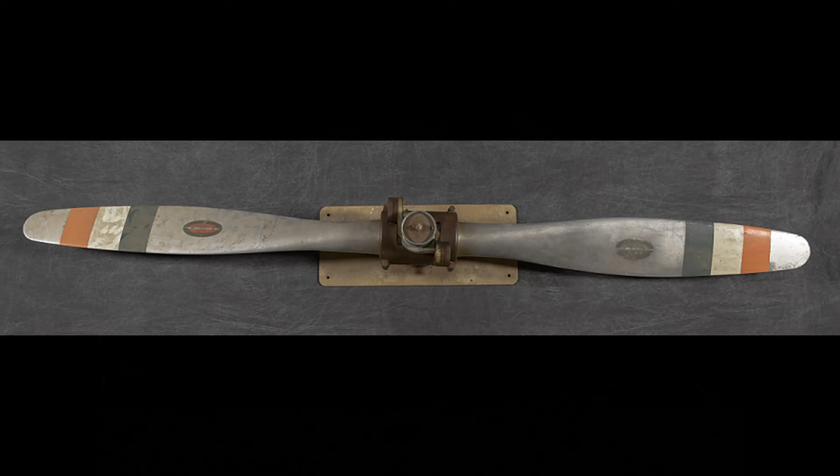Between the early 1900s and about 1940, we saw propellers go from fixed pitch to two-position pitch, then to variable pitch. Variable pitch props allowed the pilot to change the blade angles within a certain range using a control in the cockpit. These variable pitch props didn't last long because it wasn't a big step from there to add a governor to these types and make them into constant speed propellers. In other words, they added a governor to vary the pitch to keep the RPM set at the level selected by the pilot, within certain limitations. The details of how all this works is in my previous video, and I'll put a link in the description.

That brings us up to about 1939, and maybe as late as 1941. That's when nearly all the frontline US or British fighters were being equipped with constant speed props.

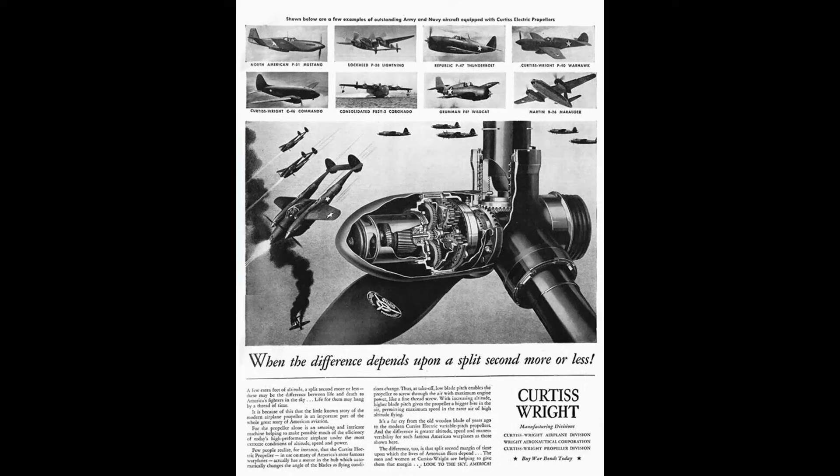Meanwhile, over in Germany, they were working on constant speed propellers of their own. It's very difficult to put exact dates on German technology from that era, but as near as I can tell, the first mass-produced constant speed propellers on German warplanes were Junkers hydraulic propellers, and they seemed to start showing up in 1938. These were used on Stukas, Ju-88s, Ju-188s, and Dornier 17s, and maybe some others. A wartime Allied report says that the Junkers constant speed prop configuration was designed for ease of mass production and was not of typical German precision.

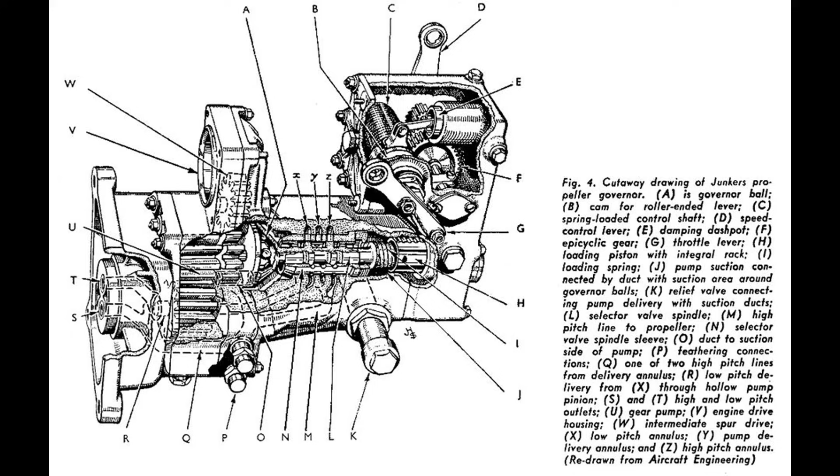Thus, it was quite heavy, and that could be one reason it wasn't seen on their fighter planes. Another reason it probably wasn't seen on fighters is because, as with the US Hamilton Standard Hydraulic or the US Curtiss Electric props, the Junkers unit didn't allow for a gun to fire through the propeller hub.

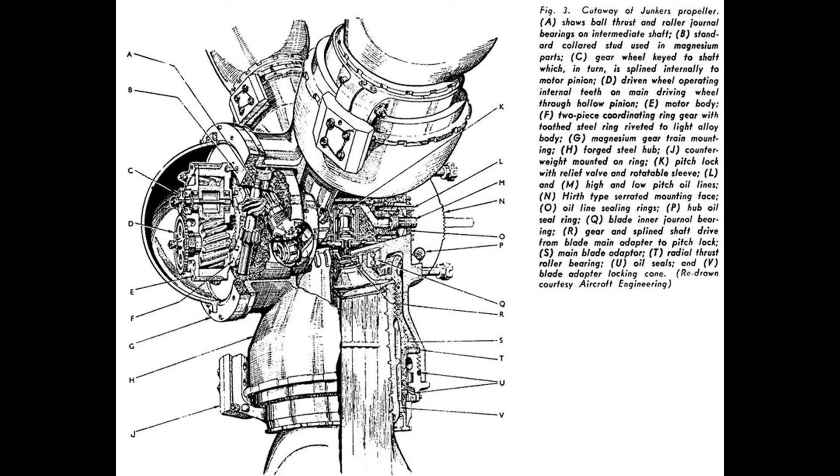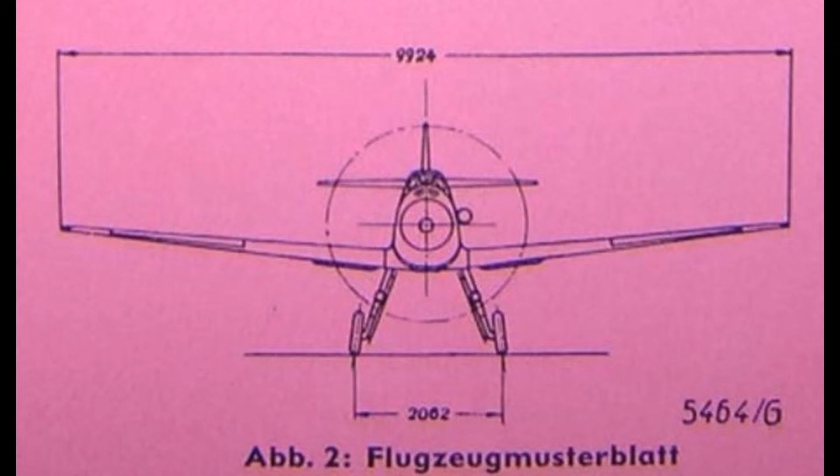The Germans seemed almost obsessed with firing a gun through that hub. They set the 109 up that way from very early on, and nearly every 109 that fought in World War II had a cannon firing through the hub. The 109's cannon is mounted a lot farther back than most people think. The majority of it is in the cockpit between the pilot's legs and at about groin level. I imagine it's quite loud in there when you fire it.

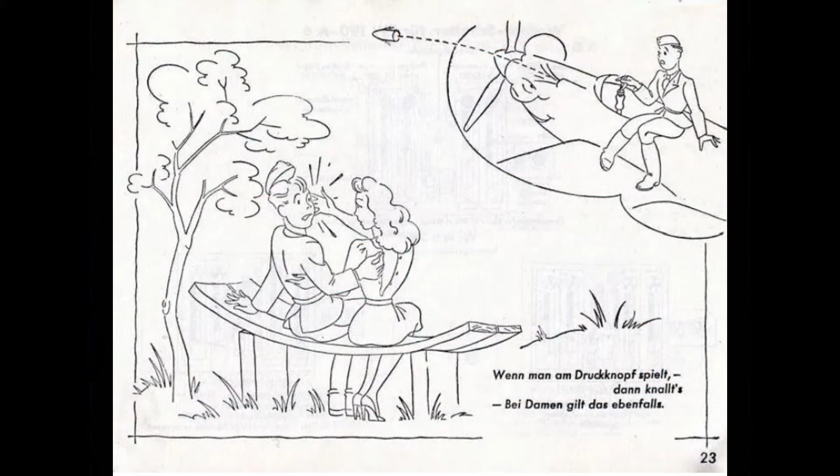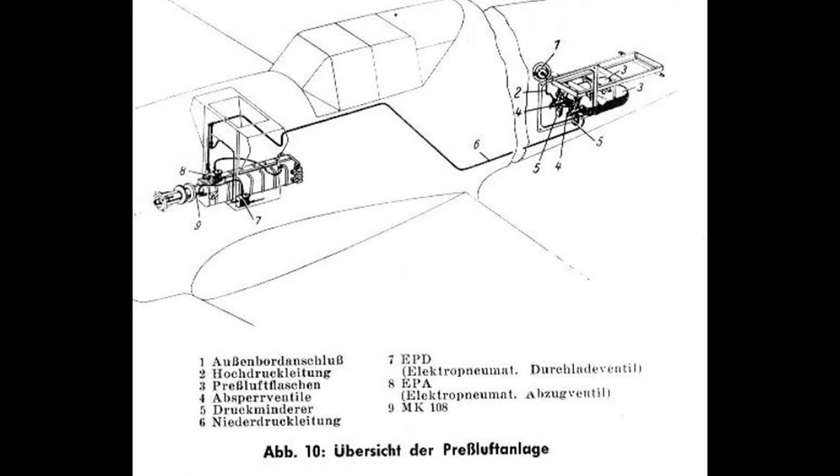Okay, where were we? Cannons. The 109 almost always had one firing through the propeller hub. The FW-190 didn't, at least not initially. That's because there was no way to do it with an air-cooled radial engine.

These planes, at least for the most part, used the German VDM propeller. VDM stands for United German Metal Works, or whatever that is in German.

Exact dates are hard to come by here, but it appears that the VDM variable pitch propeller, not the constant speed props—okay, we're going to talk about that later—but the VDM variable pitch propeller showed up on the scene around 1935. It was used on 109s fairly early on, probably starting with some of the B models.

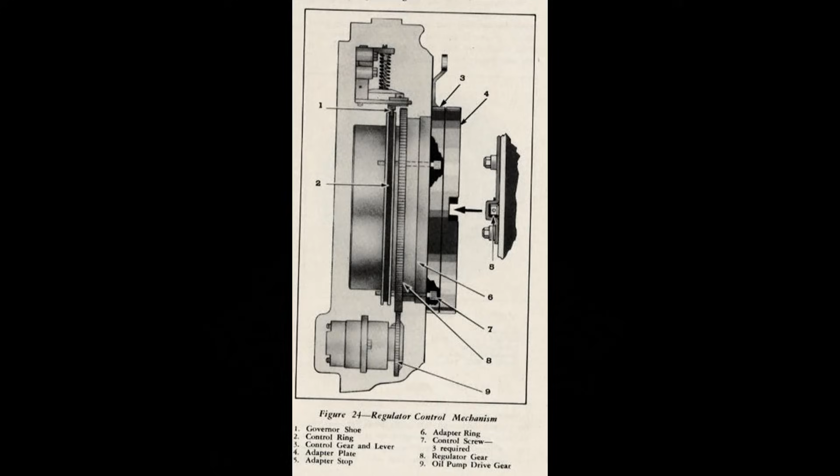On the back side of the prop, again this is Aero Products, you'll find the mechanism that turns the gears. In this case it's hydraulically driven, and on the VDM system it's electrical.

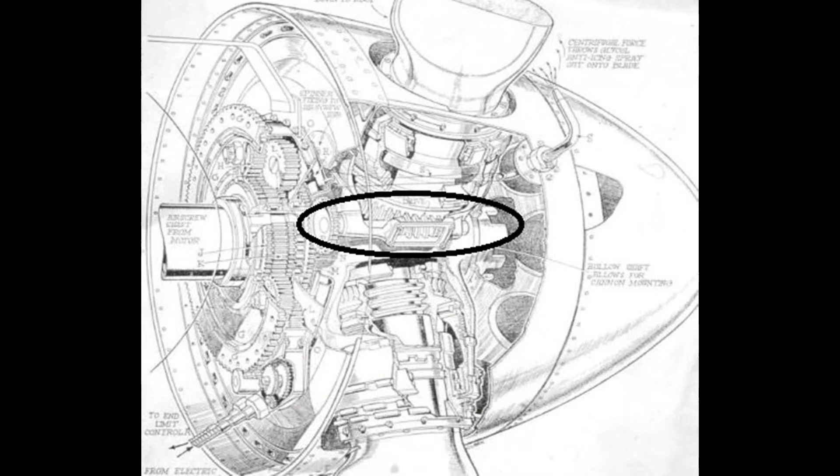Here is one of two diagrams I have for the VDM system. You can clearly see the worm gear drive, but I really don't know if this is the way all VDMs were set up or only this version. I don't even know if it's one worm gear per blade or if the blades are interconnected somehow. Here's another, this also shows the worm gear.

There are three main things you should know about the VDM system so far. It's electrically driven, it has a large overall diameter because it has to surround the hollow prop shaft, and notice that the spinner can barely cover the prop hubs, and you're going to have a spinner for reasons that are going to become apparent. So most of all here, I want you to notice this thing is big.

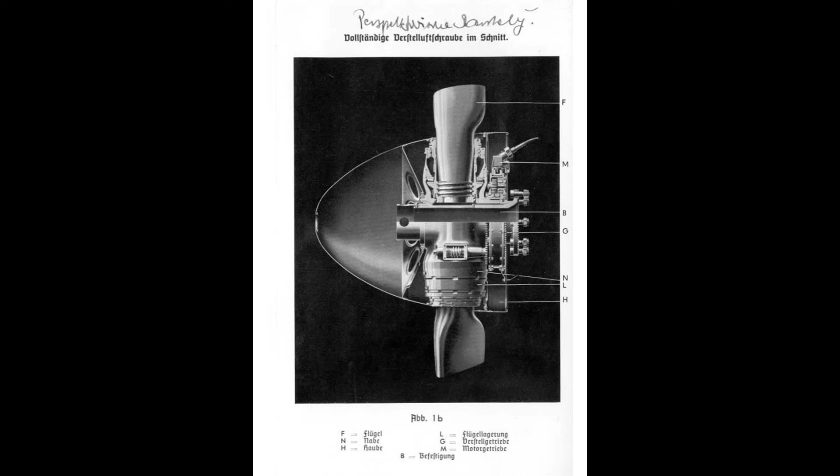The 109 uses a reversible electric motor and a flexible shaft to drive the pitch changing mechanism. The motor is about the size of a starter motor on a typical automobile. The flexible shaft allows it to be mounted in a large variety of places. As long as there's space for it and you don't have to bend the shaft too much, it's going to fit in there. It's usually mounted to the engine, so it's in different spots on different planes.

For example, a 109F with a DB601, it's going to be in one place, and then in a different spot on a 109K with a DB605. The motor is controlled by a switch, which on the early 109s is on the instrument panel.

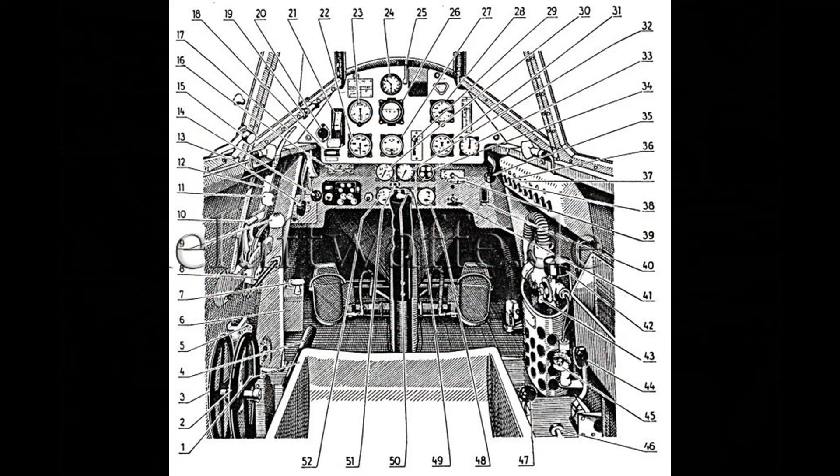Here is a picture of a 109D cockpit. It is the only picture of a 109D cockpit I can find that's from the period. This is the prop pitch control. It's not located in a great position.

Anyway, so far we have 109s with a variable pitch prop which is manually controlled by a switch on the instrument panel. And this was the configuration used on the D models and at least up through the E3s, and it probably started with B models.

These variable pitch props created considerable workload for the pilot. I explained all that in my previous video, which is why, as with the Spitfire and other fighters, they were changed to a constant speed unit pretty early in the war, and the Germans, of course, did the same thing.

So far, for the German VDM variable pitch unit, we have several components: the pitch change mechanism, the reversible electric motor with flexible drive shaft, and the pilot control to manipulate it. And there's one more key component to this system.

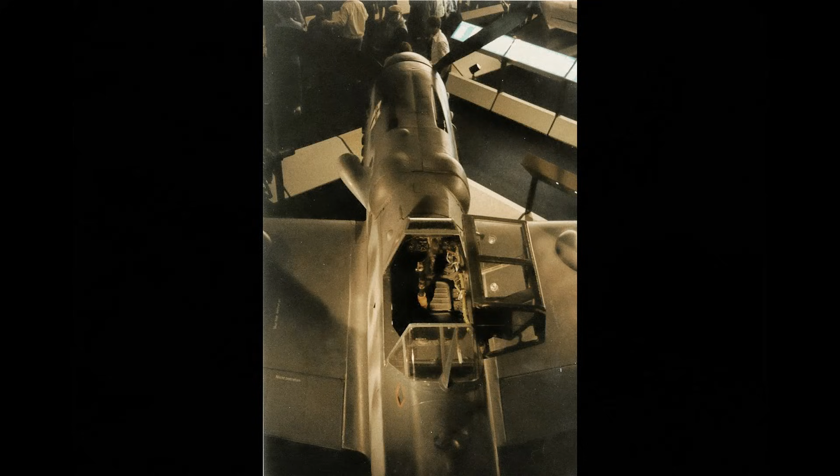They didn't get it perfect throughout the entire range. For example, best fuel economy happened at a specific manifold pressure and RPM combo, like most airplanes. And the automatic pitch control, when rigged to the throttle, didn't allow for the ideal setting. So for maximum economy, pilots would use manual pitch control in the 109. Using manual pitch control on the 109 was exactly the same as using the previous variable pitch propeller, because it was essentially the same mechanism. Again, the constant speed prop was really just an upgraded variable pitch prop with a governor.

Now, exactly when 109s got constant speed props is a bit of a mystery. As far as I can tell, no 109Ds, as in Delta or earlier, ever had a constant speed prop. If somebody can prove me wrong on that, I'd love to see it. All 109Fs, as in Foxtrot or Frederick, and later did have constant speed props. So the changeover happened somewhere in the E models.

I have this translation of a November 1940 German technical order saying that an automatic air screw, that means constant speed prop, had been introduced and was being retrofitted on 109s. It also mentions the thumb-activated switch for use during manual control. So we know that by November of 1940, they moved that pitch control switch from the instrument panel to the thumb-activated switch on the throttle, which is far superior. So we know they had that as well by that point.

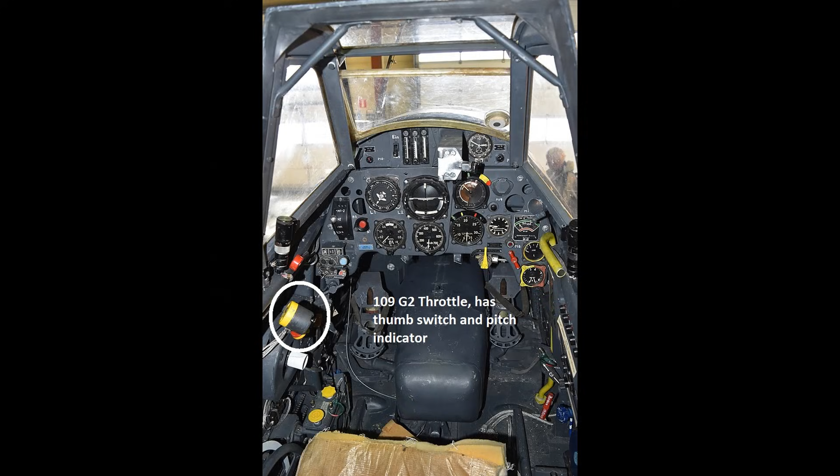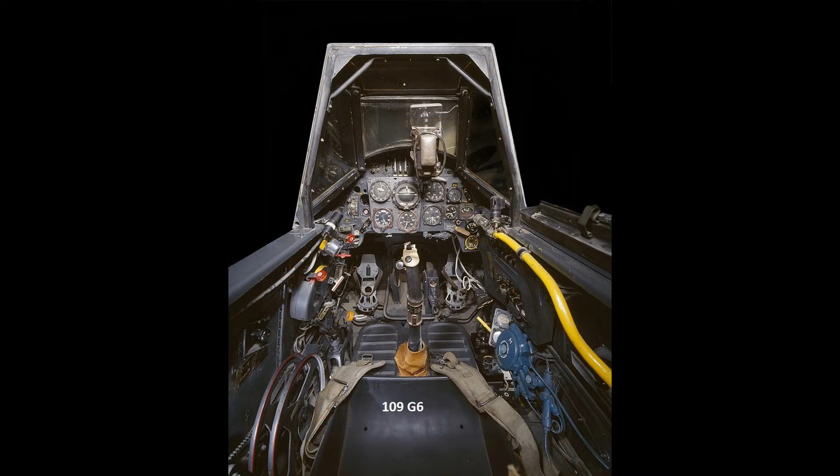From the pilot's perspective, the only change in the cockpit was a switch that changed things from automatic, aka constant speed prop control, to manual. Manual was simply the manually controlled variable pitch system that had been in use up to this point. Now, it's unclear if the conversions to the constant speed unit also added that thumb switch, or if it was already present in some 109s that only had variable pitch props. The history there is a little bit murky. Either way, every 109 cockpit that I have ever seen that has a constant speed prop has the thumb switch for use during manual pitch control.

Most also have the prop pitch indicator that was probably more important during the era of variable pitch. Although I've seen some 109s, including the G10 at the U.S. Air Force Museum, that don't have the prop pitch indicator. So it's not clear to me if some of the planes were built without them or if there were post-war changes. I think the former is more likely. I think some of the planes were just not built with that indicator because it wasn't critical and they probably had supply shortages.

Normally, the prop would be in automatic mode, but in the event of a system malfunction or battle damage, it could be put into manual, much like the Curtiss Electrics. As mentioned earlier, manual control could also help with range, at least on the 109E manuals. They may have got that fine-tuned more on the later ones.

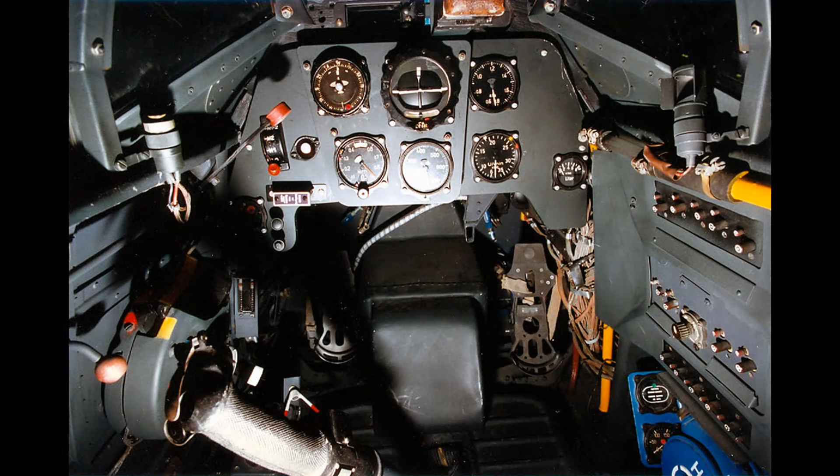Starting with the E7 and possibly a little earlier, all 109s used this system, an electrically controlled constant speed prop with a backup control using an electric increase/decrease switch to manually adjust pitch. In terms of operation, it's quite similar to the US Curtiss Electric.

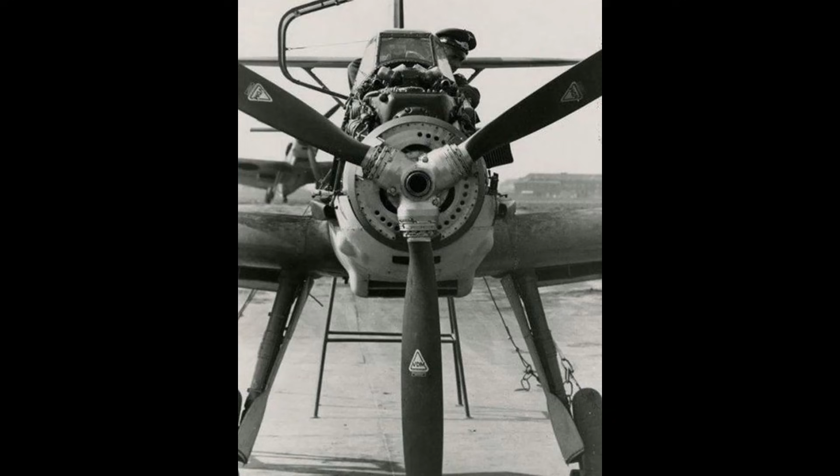This brings us to the big question of blade count. I get this question all the time. Why didn't the Germans use a 4-bladed prop on their late war fighters? And that's a complicated question, and that's why there's all this buildup to it.

I want to start off by saying that this question assumes that 4-bladed props are always better, but that's not true. There is a school of thought which seems valid that fewer blades are more efficient. I went to Hartzell's website - they make good propellers, and they address this very question. They point out that 2-bladed props are more efficient, but efficiency doesn't move the airplane. That's an interesting statement, and it will probably make more sense as we move along.

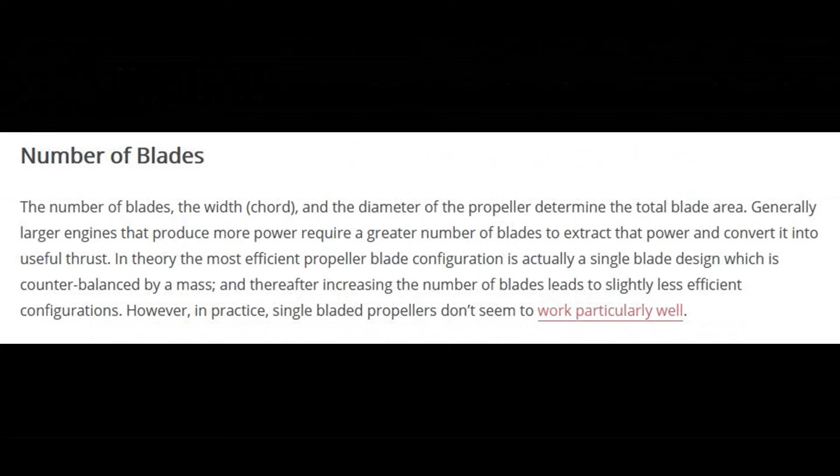Here's a statement from Aero Toolbox. They make it clear that you need more blades to absorb more power, but increasing the number of blades actually makes the prop less efficient, which agrees with what we read from Hartzell. So I would describe that as the modern viewpoint. They also mention that a single-bladed prop is the most efficient type. That's because the more blades you have, the more you lose due to the vortexes at the tips. We kind of got into that in the previous video.

Ideally, what you want is one single, very thin but infinitely long blade, but of course reality gets in the way of that plan. Now, there were single-bladed props in production, at least to some extent, at one time. These may have been better in theory as compared to a 2-bladed prop, but not once reality sets in.

There are several problems. First, they have to be counterweighted. That counterweight is not only weight, it causes drag and adds no thrust. If the counterweight was shaped to add thrust, so it wouldn't be just a worthless weight out there, well then it wouldn't be a single-bladed prop anymore.

Next, you need to keep the total blade area about the same as you had with the 2-bladed prop, or 3 or whatever you had before you're trying to make it a single blade. But if you make the single blade 2 or 3 times as long as the other, you're going to run into tip speed and or ground clearance problems. If you increase the chord instead, in other words, make the prop blade fatter, that itself decreases efficiency as explained in the previous video, so you're back to square one.

Then you have the issue of an asymmetrical load being applied to the engine bearings. Engines weren't really made to take such loads, so there were concerns there. These props, and for some reason I don't fully understand, they cost several times that of a typical 2-bladed prop back in this early era when they were doing it.

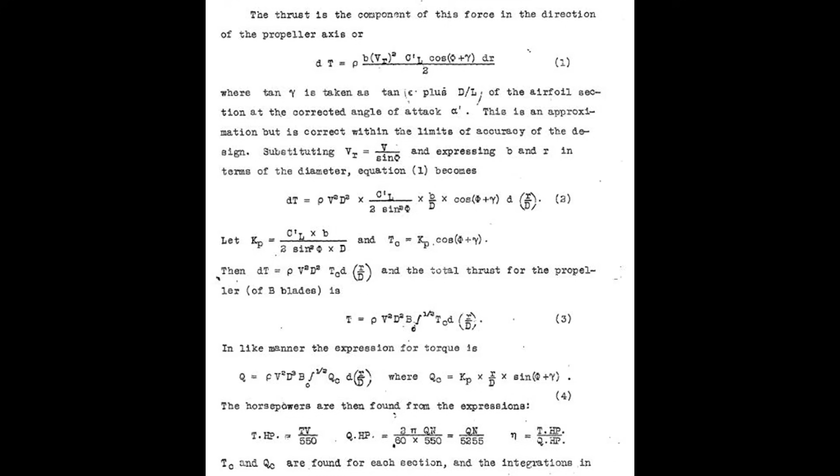Now, there are some aviation YouTubers that can burn through this kind of stuff. I don't know if it'd be popular enough to make a video on the math problems of propellers, but I do think there are people on YouTube that can do that. David Lednicer certainly comes to mind. I'm sure Millennium 7 could do it. That's a channel worth watching. I don't know if I've brought it up before. And Adam the Engineered, I'm almost certain can do all this stuff too.

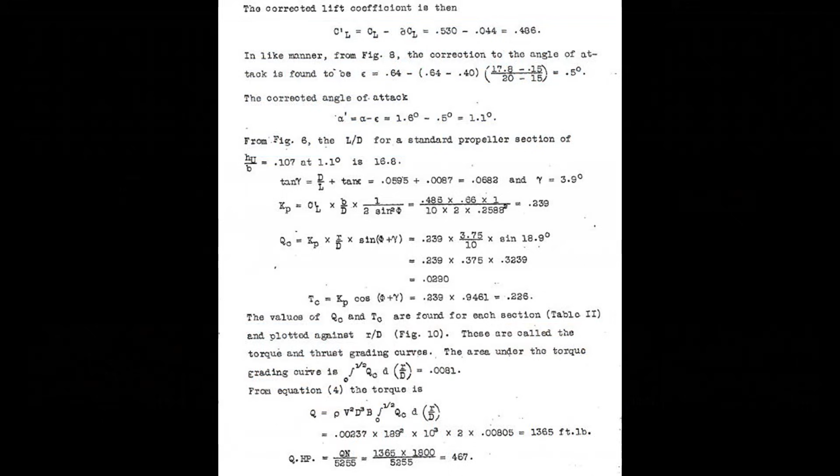But again, this math is way beyond what I can do, so we're not going to be going over it. Thankfully, I don't think we need to. NACA put a lot of stuff in text to summarize all this stuff. So what is blade element theory?

Blade element theory, well, let me back up a second. Let's look at the actual explanation from a NACA report, a different report, but nevertheless. Blade element theory states, and I'm paraphrasing here, that if all other factors are equal, more blades means that the prop can absorb more power and will be more efficient. More blades better. At first, that would seem to contradict what we saw from those modern sources earlier, but I don't think it does.

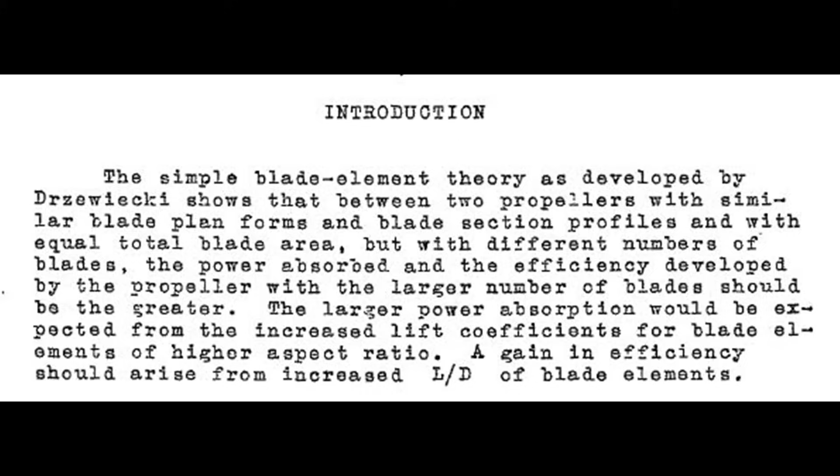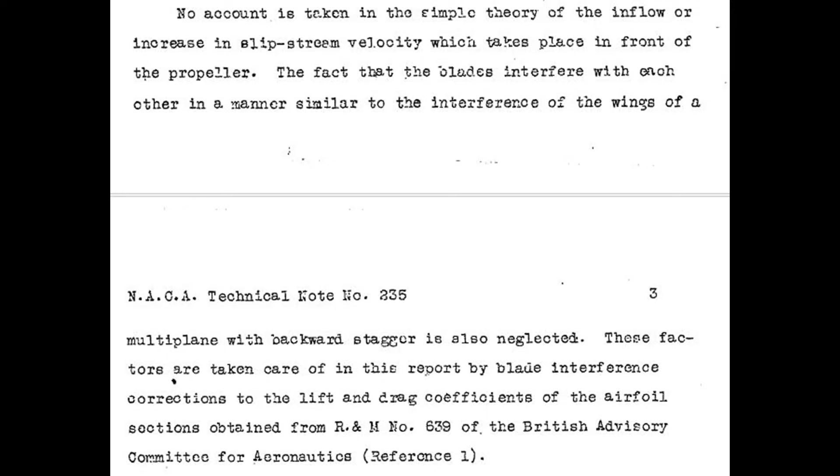Back to our 1926 report. This report makes it clear that blade element theory doesn't take certain real-world realities into account, like the fact that the blades interfere with each other when installed on a real propeller. It's also true that it doesn't take into account the extra hub drag you get with extra blades, although that's discussed in another report.

When comparing 3-bladed props to 4-bladed, it has to be done at equal solidities. Otherwise, you're comparing different sized props, not different blade numbers.

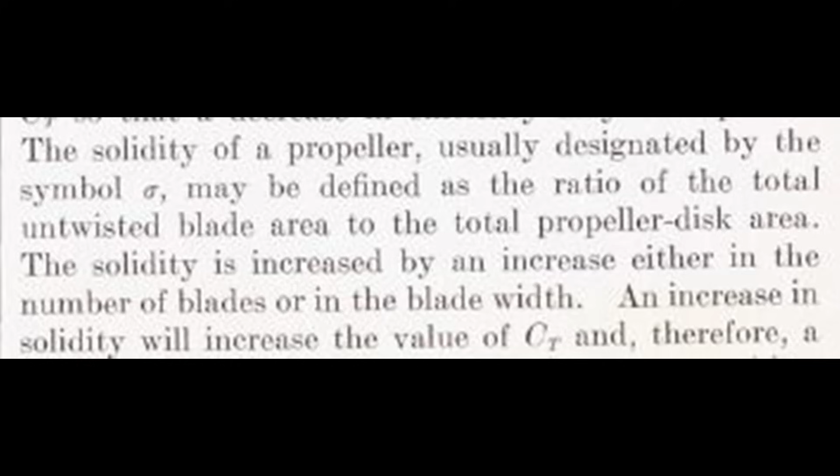In the case of the P-51, they not only improve cooling, but also increase ram air pressure to the supercharger at low airspeeds, much like in the FW190A.

Back to our NACA report, this one is from the Daniel Guggenheim lab at Stanford. The Guggenheims were major players in the mining industry and thus very wealthy. Daniel's son Harry was a pilot and flew in World War I, though I don't think he was a combat pilot, more likely serving in some other capacity. They became very active in funding and promoting aviation. A lot of the NACA reports were privately funded, which some might find surprising. Back then, Stanford was known for engineering, and one of the Guggenheim labs was built there. I don't know if it's still there today, but many of the others still exist, or at least the buildings do.

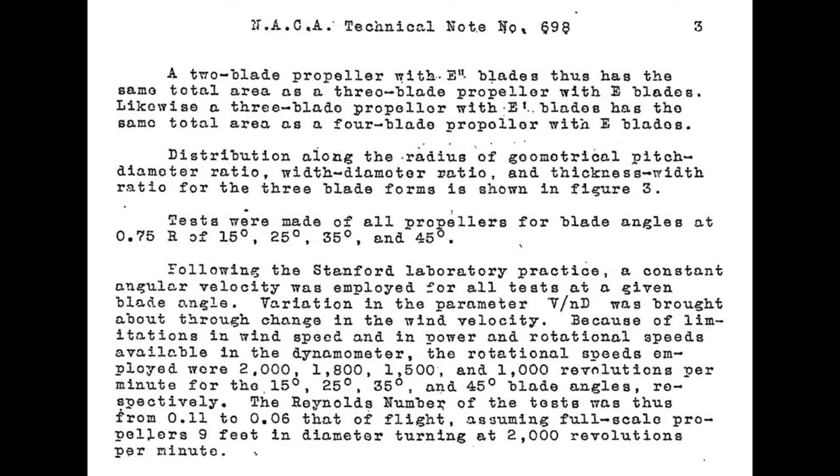Back to our NACA report, they tested 2, 3, and 4-bladed props of equal solidity at various blade angles, because you can't just check the prop at one blade angle - it's going to work within a range, and one prop might be superior at fine pitch while another is superior at coarse pitch. They found that the advantages of the extra blades were largely offset by the extra hub drag, so they fitted spinners to reduce hub drag and lessen that effect. Then, as predicted by blade element theory, they determined that 4-bladed props had the highest efficiency compared to 2 or 3-blade props and could absorb the most power.

So the next question is, how much better was the 4-bladed prop compared to a 3-bladed unit? The answer is not much. The four-bladed prop was about 2% more efficient and could absorb about 4% more power. You might say, well, 4% more power, I'll take it. But first, if your existing three-bladed prop can already absorb that power just fine, it may not be worth going up to a four-bladed prop. I feel this statement from NACA summarizes this concept pretty well.

When you factor in the extra complexity of the constant speed mechanism needed with more blades, it just might not be worth it. I'm hugely paraphrasing this report here, so I will include it in the Patreon folder, so if some of you guys want to peruse this stuff on your own, you'll be able to.

But regarding this four-blade versus three-blade thing, there's not a huge amount of difference. There is some, yes, especially at high altitude, but think about this from the German standpoint: their three-bladed prop can handle the power they have. If they increase it to four blades with the same solidity, sure, it would be slightly more efficient, but that's about it. With the state of things in Germany in 1944, if you were in charge, would you have decided to hold up production to gain 2% more efficiency out of your prop? Probably not. I don't actually think that's the main reason they stayed with the three-bladed design, but I do think it's a factor.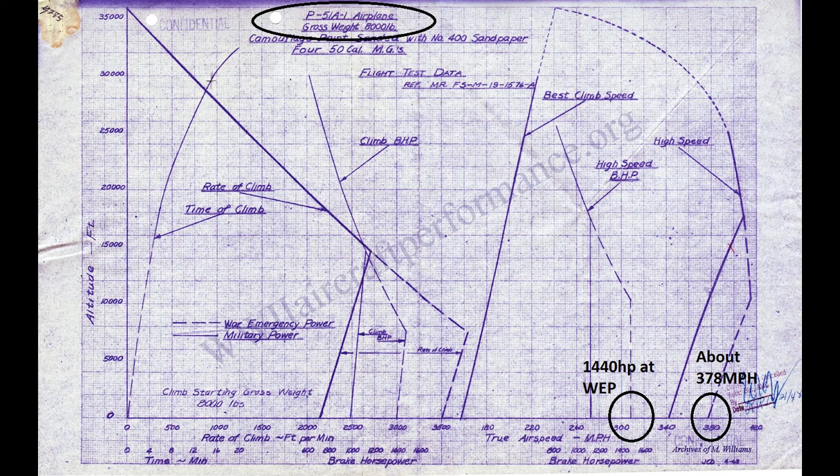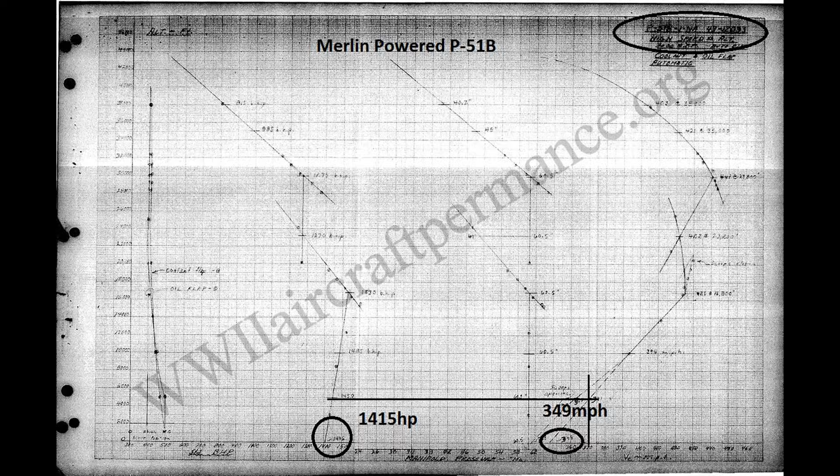The same is true of the P-47 Thunderbolt. The Corsair and Hellcat had 2,000 horsepower in the early versions, and these early versions still had three-bladed props. They were naval fighters, of course, and so were typically expected to be fighting at lower altitudes. Although when power went up, the later Dash 4 Corsair did get a four-bladed prop. The four-bladed prop Corsair had 2,450 horsepower, depending a little on exactly when you're looking at the plane in terms of time. But that 2,450 is up from the original version's 2,000.

So yes, more blade area was needed, and the only good way to do that was to add another blade. You couldn't make the prop much bigger in diameter on the Corsair. Now, with both of those airplanes, the early Corsair and the later Dash 4, running at 2,000 horsepower down at sea level, they appear to have about the same maximum speed. I say appear because there aren't many tests of the Dash 4 that I could use for a really apples-to-apples comparison there.

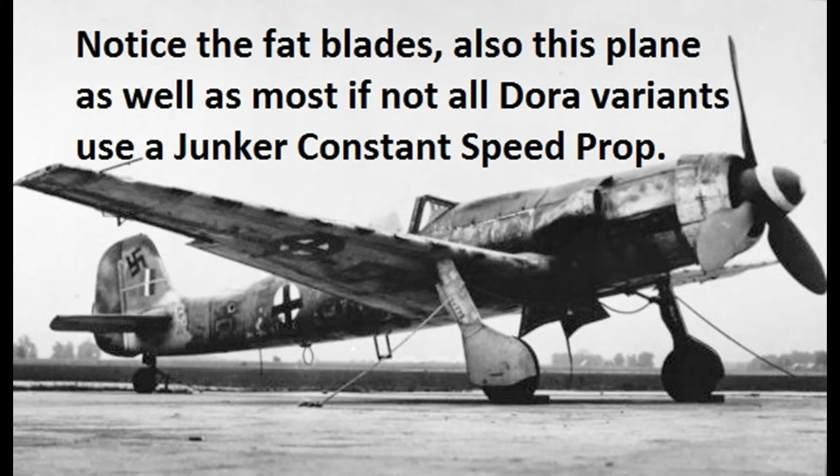One theory I'm hearing a lot is that the Germans kept the three-bladed prop due to the machine guns firing through the propeller disc. At first that kind of makes sense, but I don't think it's correct. First of all, if they went to a four-bladed prop and kept the same solidity, then the total amount of blade area in front of the guns is going to be the same. Furthermore, synchronizing to fire through four propeller blades is not a big deal. The P-63 King Cobra is set up that way. In fact, the Germans, even in World War I, had machine guns firing through four-bladed props on the Siemens Schuckert D4, as well as the D3, and there were some others. The FW-190A models and the Dora 9s have four guns firing through three prop blades, so synchronizing two guns to fire through four prop blades seems to me to be much less of a problem.

The FW-190 Dora 13s have no machine guns firing through the propeller, just the two wing cannons, but they still have a three-bladed prop. The same is true of the TA-152. So clearly, adding a fourth blade shouldn't be an issue, since that would only require two guns to fire through the four blades, and we know they'd been doing that as far back as World War I. However, both the late Doras and the TA-152s have cannons firing through the prop hub like a typical 109, and I think that is the main reason they stuck with the three-bladed prop.

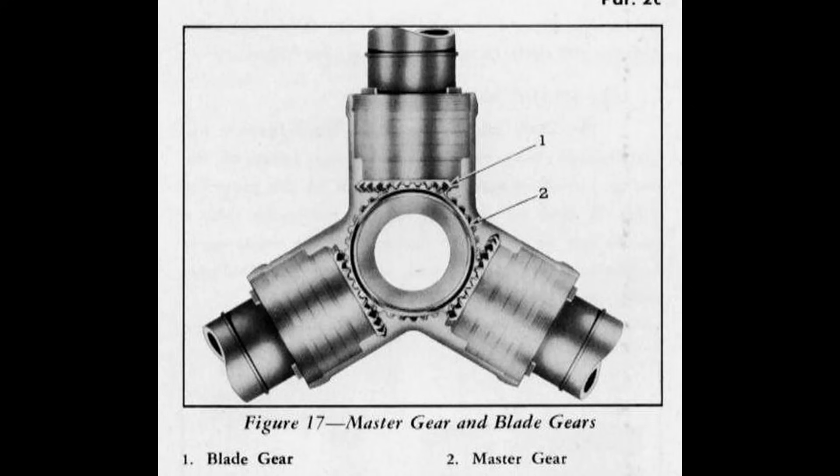That leaves us with making the prop hub bigger. Take a look again at that VDM constant speed setup. You remember that worm gear from earlier? Well, that worm gear alone means you've got to make this thing bigger to add another blade. Remember this picture, that spinner barely covers the prop hub. There's no extra room there, and it's the same way on the Dora 13.

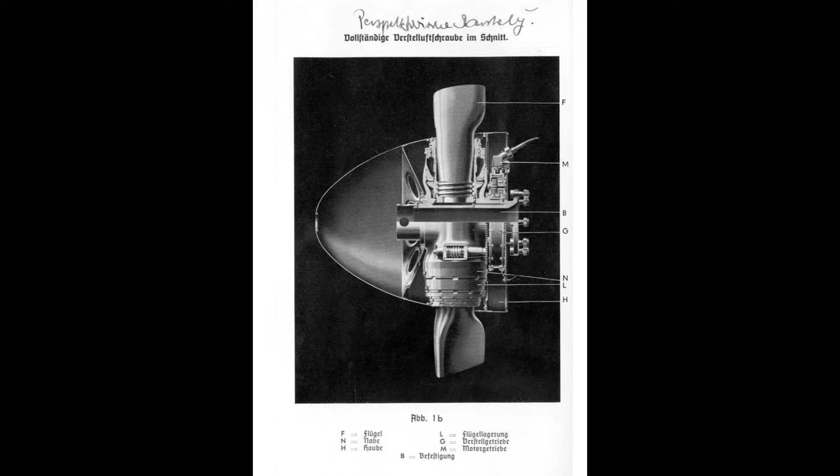What about the Dora 13 and the TA-152? Well, I think it's the same basic problem. If you make the spinner bigger, that's going to block off the cooling air for the radiator and oil cooler. That means you would have to add coolers somewhere else to the airframe, which is probably going to cost you more than you're going to gain by adding a propeller blade to the prop.

So we don't have a really great smoking gun here, no solid evidence about why the Germans stuck with the three-bladed prop on their late war fighters. I wish I could tell you I had the secret stash from Kurt Tank that explained why he did what he did. Well, we don't have that, but we do have a lot of factors we can see, and I think all of these are factors the Germans would have been considering back during the war.

I think they would have considered the possible gains with a four-bladed prop, but probably concluded it wasn't worth it for three main reasons. Chief among them, they wanted to keep that central cannon. They didn't want to retool for an all-new constant speed mechanism, and I'm not even sure they could have done it and still fit it onto their existing planes.